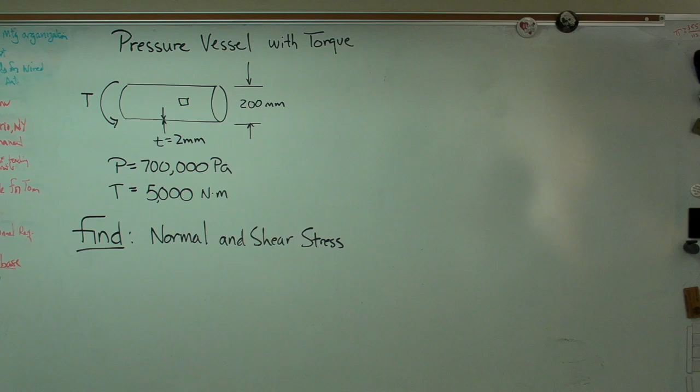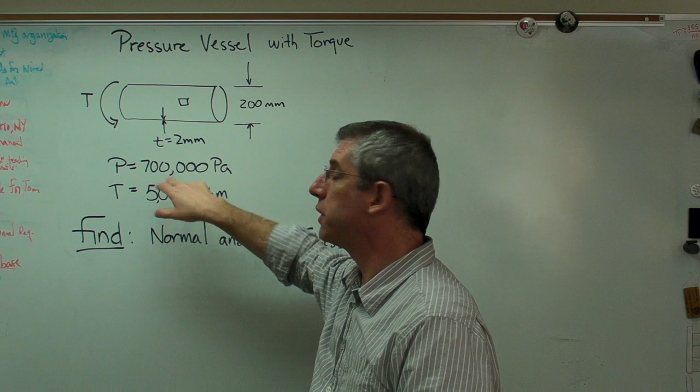Okay, this example calculation is going to be a pressure vessel with a torque being applied to it. I've got a long, thin pressure vessel, which is 200 millimeters in diameter, with a wall thickness of 2 millimeters, so it's a relatively thin wall. And it's being subjected, in addition to the internal pressure of 700,000 pascals, to a torque of 5,000 Newton meters.

We're going to have a stress element on the outside of this pressure vessel that has stresses in the X and the Y directions because of the internal pressure, but also shear in the XY direction because of this torque. Okay? So this is going to progress in 2 stages, since these clips have to be 10 minutes long or less in order to fit on YouTube.

The first clip, I'm going to figure out normal and shear stresses. For the second clip, I'm going to show how to take those normal and shear stresses we've calculated and draw Mohr's circle so we can figure out the maximum normal and maximum shear stresses. So let's do first things first and figure out normal and shear stresses. First, let's write down the governing equations.

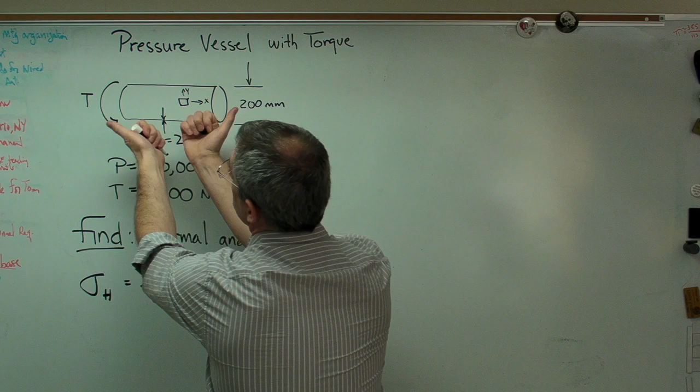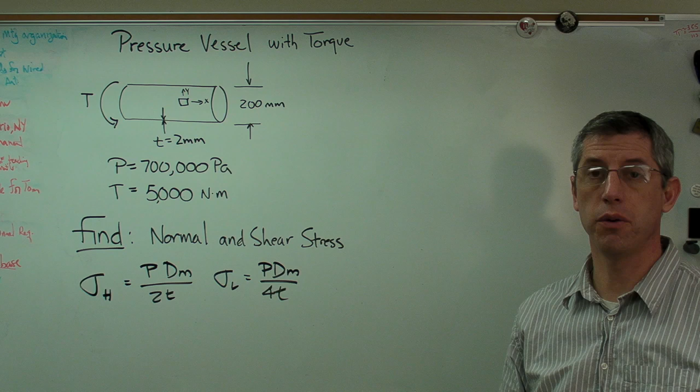Those are pretty simple. The hoop stress, that is the stress that makes the pressure vessel want to grow in diameter, is pressure times the mean diameter, the average diameter, over twice the thickness. The longitudinal stress, that is the stress that's trying to make the pressure vessel grow that way, is half the hoop stress, or that, over 4t. The last thing we need to know is an expression for shear stress due to this torque.

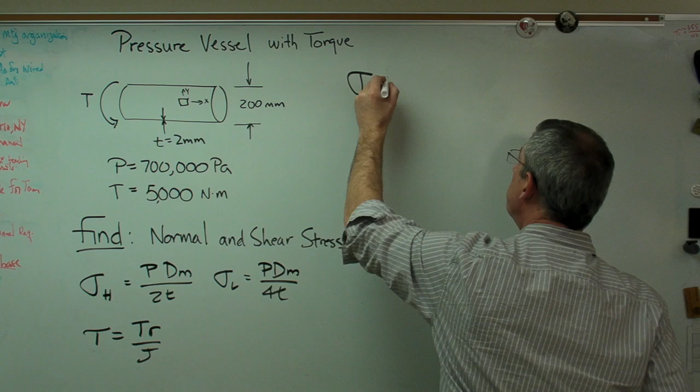And let's see, I'll write that over here. Shear stress tau equals torque times R over J, where R is the radius to the outside of the tube and J is a moment of inertia. All right, let's start with these two. The hoop stress, remember, is the stress that makes the tube want to get bigger. It's in the radial direction, or the tangential direction. It's P dm over 2t.

Pressure is 700,000 pascals. That's in newtons per meter squared, times the mean diameter. The mean diameter is the average of the inside and the outside diameter, so it's the outside diameter minus the thickness. Since we have an outside diameter of 200 millimeters and a thickness of 2, our mean diameter is 198 millimeters. I'm going to write that out in meters to keep the units consistent. And twice our thickness, there. I have a 2 millimeter thickness.

Now let's check the units real quick. The stress should come out in pascals, newtons per meter squared. So if I cancel that and that out, I'm going to get pascals, right? This works out to be 34.65 megapascals. Now, to figure out longitudinal stress, we can either go through this calculation again, or we can do the shortcut. Since that's a 2 and that's a 4, the longitudinal stress is simply going to be half the hoop stress, and that's what I'll use.

So longitudinal stress is 17.325 megapascals. All right, so I've got 2 of my values calculated. Last one's going to be that one. So let's clean up the board here a little bit. 34.65 and 17.325. Okay, so let's clean out some space here.

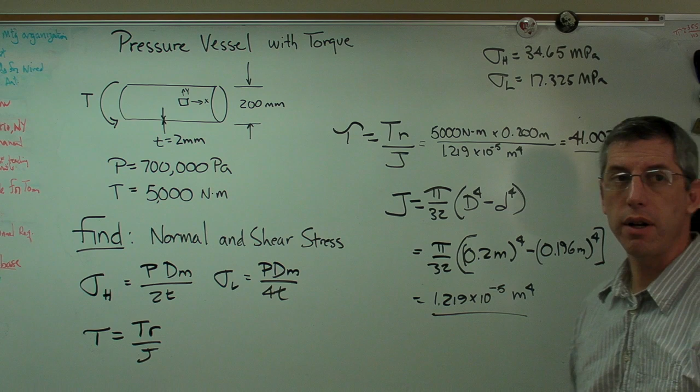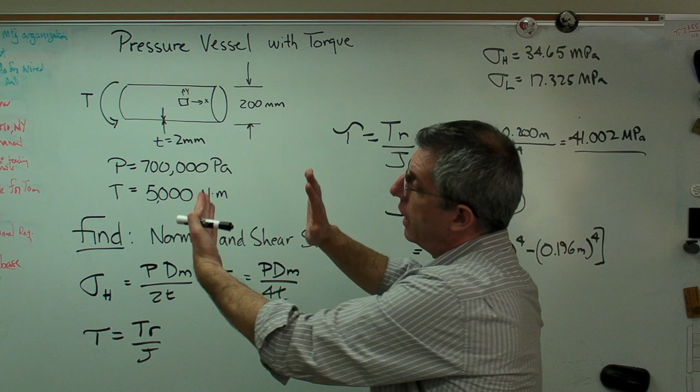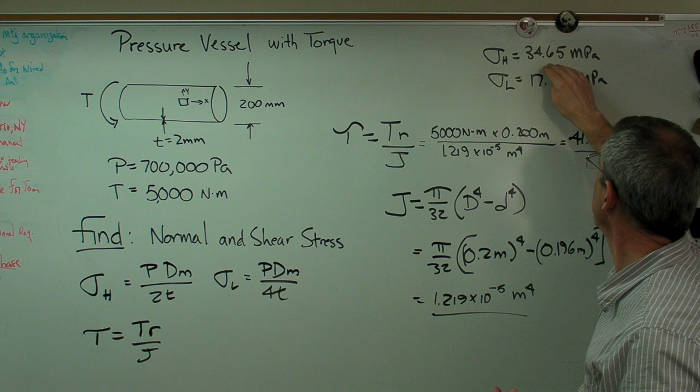And we get, make sure I get this right, 41.002 megapascals. So there you have it. We now have three stress components: a normal stress in the x direction due to longitudinal stress, a normal stress in the y direction due to hoop stress, and a shear stress due to torque. The next clip is going to show how to take these three components, the x direction, y direction, and xy direction, and draw Mohr's circle using those.